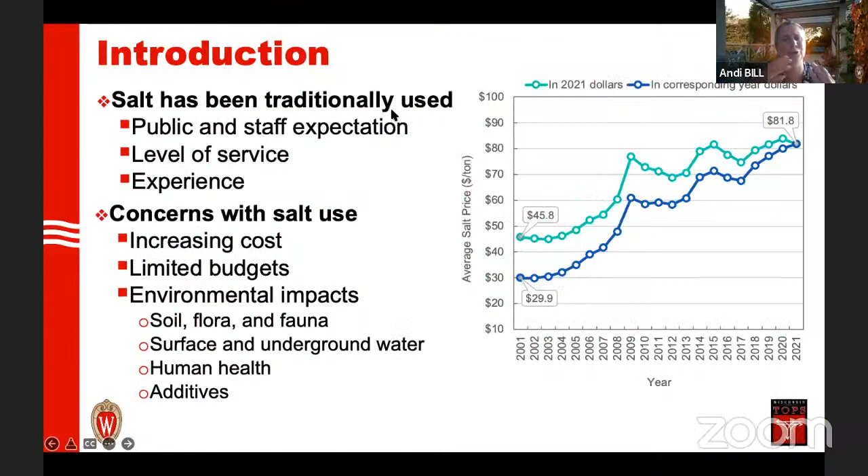Salt has been traditionally used. It is a public and staff expectation about how we clear our roads. It's salt, right? There's a level of service and an experience level with it. But as we know, there are concerns with salt usage.

I was just learning more about what Allison does and this training that goes along with it. Not only is there an increasing cost, which you can see in the graphic on the right-hand side of the screen, but while the cost is increasing, our budgets are not. So we have limited budgets. And as important as those are, we want to think about the environmental impacts as well.

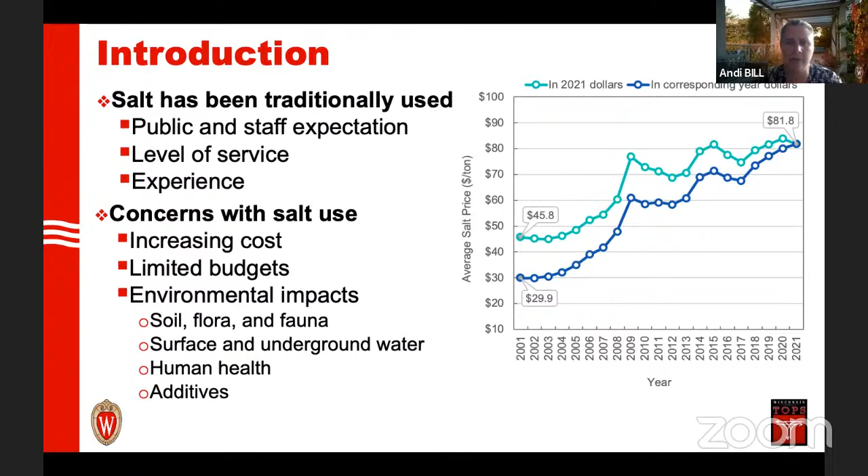Whether it's soil, flora, fauna, or what you guys are working on here with surface and underground water, human health, and also the additives, we know those are concerns with it.

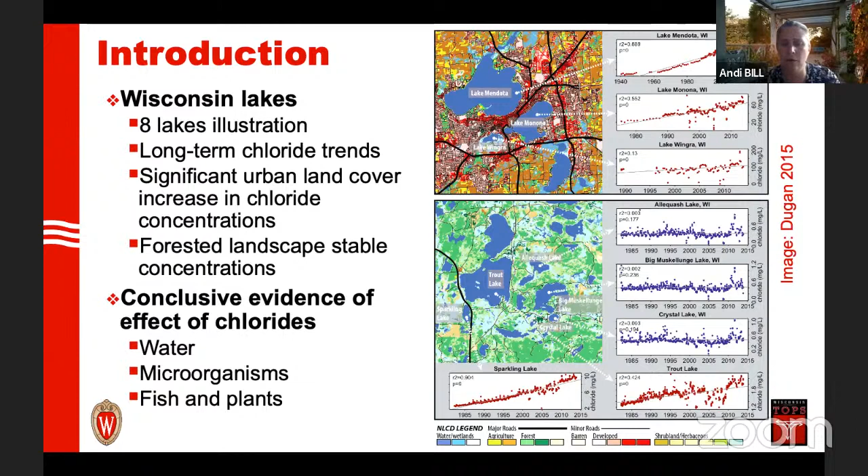So the objectives for the study: we had done a pilot study the winter before, which would have been 2019-2020, right at the end, or right before COVID. Then we wanted to expand the field data collection from the previous research to add more counties and more experience levels.

We wanted to evaluate Wisconsin salt brine applications using four metrics: salt use and salt reduction, the common performance metric of time to bare wet conditions of the pavement, and friction, which I'll put in quotations - we'll talk more about what that is - and the benefit costs of it.

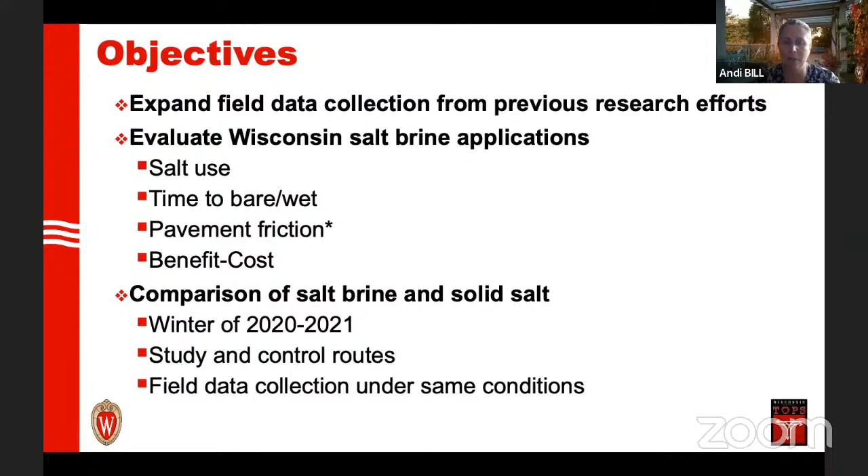We wanted to look at the comparison of salt brine to solid salt use over the winter of 2020 to 2021. We had study and control routes, which I'll talk a lot more about, and we wanted to make sure our field data collection was under the same conditions in both areas.

I won't get too researchy here, but we wanted to make sure our studies were done as accurately as possible so there couldn't be any question about whether your treatment route was completely different than your control route. So we wanted to make sure we looked at that.

We either did a study in parallel, where we had a divided roadway and they salted in one direction and used salt brine in the opposite direction, or we had a county that did a split study, actually over the county line a bit - they divided the route into two sections, one salt and the other brine, so we could compare the metrics.

We also had some areas where neither of the other two were possible, so we did an independent study where the study and control routes were not necessarily directly geographically located, but were in a similar area. We tried to make sure the routes had as similar conditions as possible.

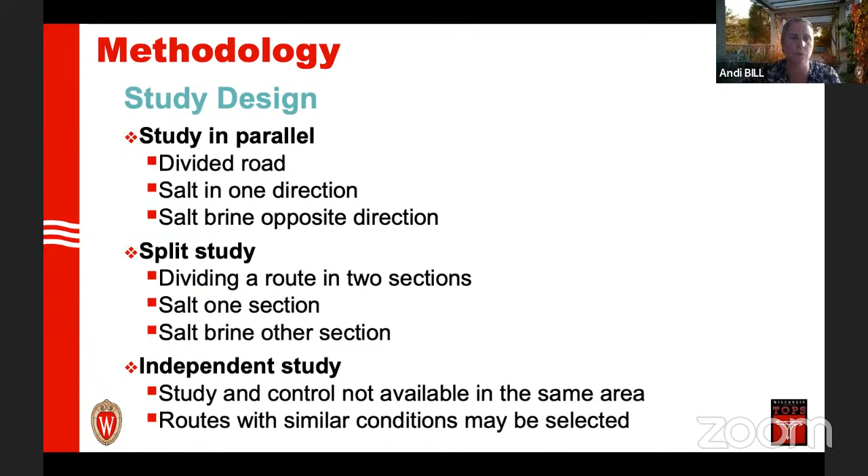So similar traffic volume, similar speeds, similar distance away from the sheds and things of that sort - those were our methodologies in picking the routes. As always, the data collection is so important, and none of this work can be done without our county partners.

We can't do any of this work without having people dedicated to collecting this data and getting back to us on a regular basis. So we started with just the basic route information: what was the location, what is the length of it, what are the number of lanes, and the start and end points of them both.

From the equipment information, we wanted to know what the brine makers were, storage, trucks, spraying systems, and the pumps. Those were collected at the beginning of the study.

And then for each storm event, we had an online report form that got information from both the study and the control routes—the study, I might say treatment routes as well. So the treatment was the salt brine, and the control route is our salt usage.

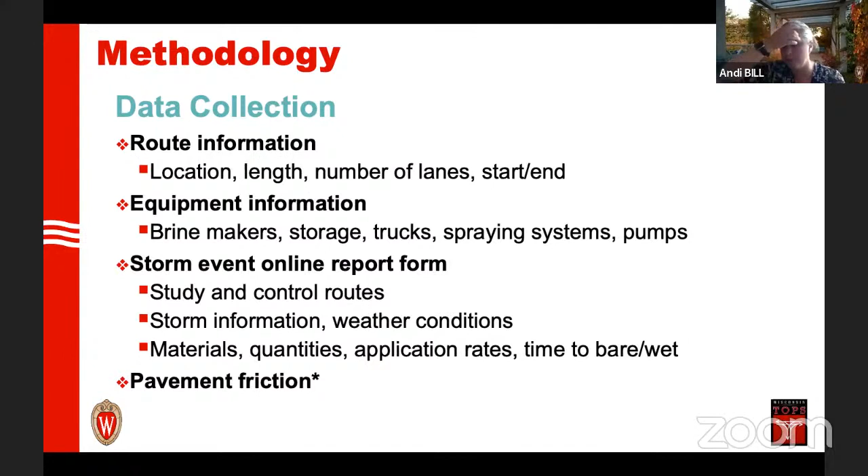We collected storm information, weather conditions, and then we wanted to know materials, quantities, application rates, and time to bare wet. So we want to be able to capture all that information, and then the pavement friction. I know there's an asterisk next to that, and we'll talk a little bit about that.

The asterisk next to pavement friction is there because when we think about traditional ways of collecting friction data, it is by a skid test—you have a wheel that gets put on the roadway, and you're pulling it to see what that force is to pull that stationary wheel through. Obviously, we can't do that at highway speeds, and there are other issues with it.

So we use this advanced road weather information sensor called MARWIS to be able to collect this data. Again, the friction is in asterisk form because it is getting a value of friction with it.

What we really want to do is compare the study and control routes together to see about that. The reason why is that we heard from both law enforcement and the public: 'I can't believe you're putting brine down on the roadway. You're putting water down in freezing conditions, and it's just going to make the road icier and more dangerous. So what you're doing is not improving safety—it's actually hurting safety.' That's what we were hearing qualitatively.

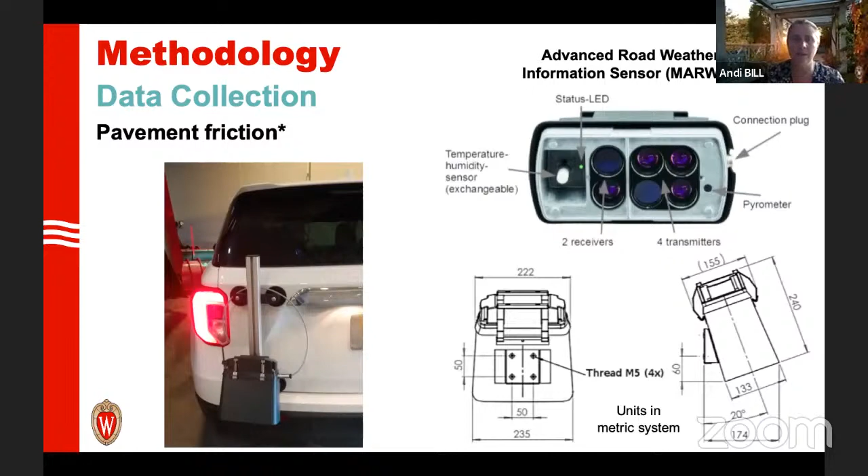And so those of you who might know me say, okay, let's get to the data—let's actually see what's going on out there so we can have hard numbers to compare. There's also information with regards to temperature and humidity sensors, which we'll go into.

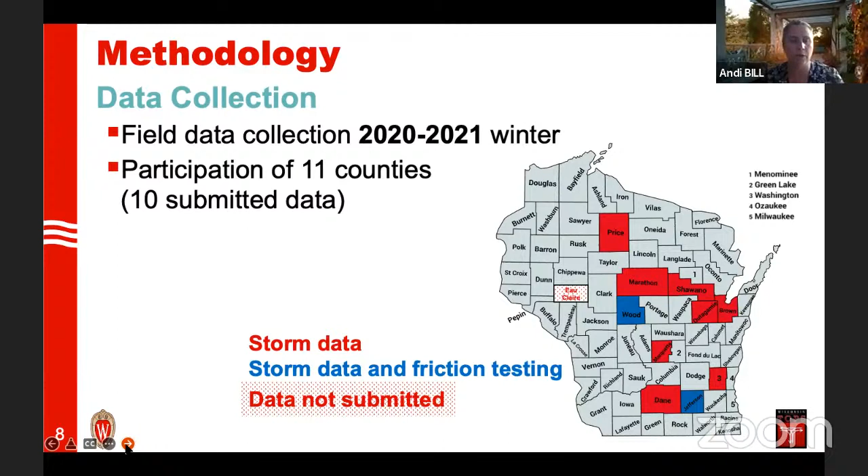You can see for the most part it's pretty spread out across the state. We don't have a lot in the northwest component of Wisconsin, but a fair amount across the state, both north and south, in that central location. So I think it was a fairly good representation of our state.

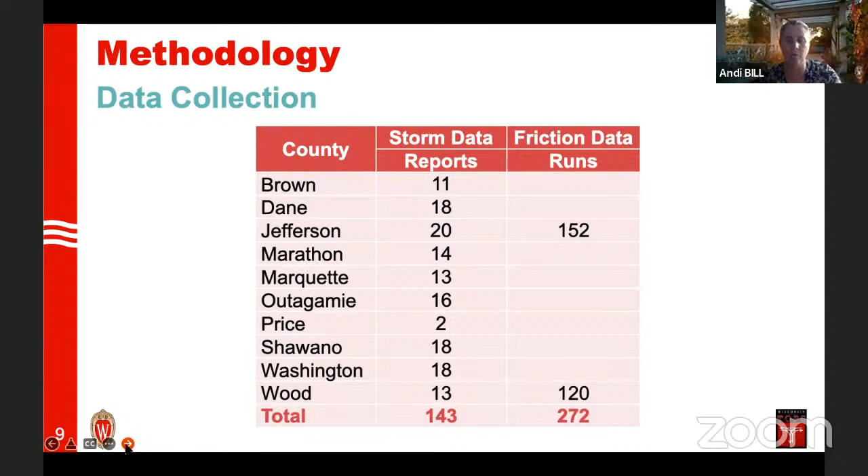So here's the numbers. The first question anybody asks me is usually, well, how accurate is the data? What's the sensitivity of it? You can see here we had storm data reports for 143 storms over those 10 counties, and for our friction data runs, we had 272 data runs. So we have a larger sample size there, which is great to really be able to look at these.

For our data analysis, we did salt use, time to bare wet, and pavement friction. We did a site and group comparison, and we wanted to see if it was statistically significant—so it wasn't just by chance or randomness that these results were different—using a t-test to do that statistical analysis.

We wanted to do a benefit-cost standpoint. Instead of just looking at the cost of salt brine per gallon, we wanted to look at introducing salt brine applications into existing solid salt applications, since most people are already doing solid salt. So what is that benefit cost of introducing salt brine into your actual work? We did a horizon of 10 years to say, okay, what would it take to get to that in 10 years? Do you have a benefit cost that's greater than 1 or not, and how many miles does it look at?

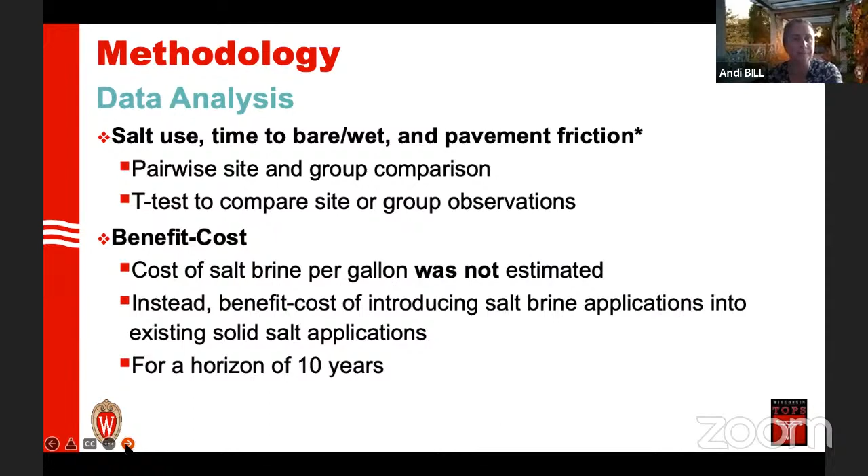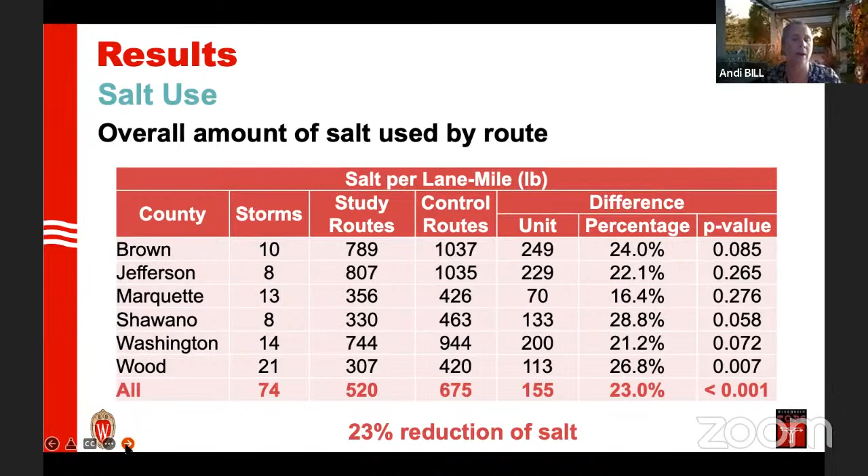So those of you who are familiar with salt brine, this is probably kind of a duh situation a little bit: because it is a solution, we have salt mixed in with the water, the overall amount of salt used by route is less, right? So we can see here that we had a 23% reduction of salt in our study routes compared to our control routes. You can see that p-value there is very, very low. It was statistically significant, which was great to show that, yes, we did have a reduction in salt when we used the brine on the routes compared to the solid salt that we were using before.

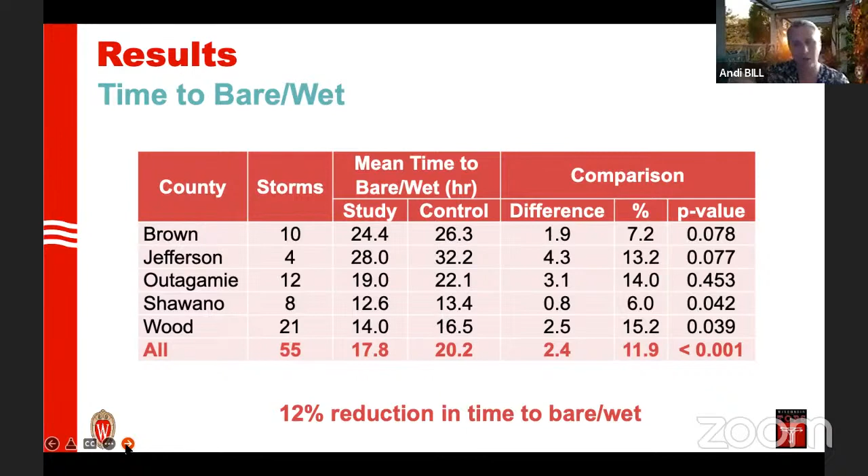The next thing is something that we use to say, okay, well, how quickly are our roads getting back to normal? So we talked about that as our time to bare wet. So what is the amount of time that it takes our roadways to get back to bare wet conditions? And so here we can see by our data that we had a 12% reduction in time to bare wet. So not only are we using a lesser amount of salt when we use our brine on our study routes, but we're also seeing a reduction in time to get back down to bare wet conditions. So far so good. You can also see that p-value there is below 0.001, so statistically significant as well.

Okay. So pavement friction, right? This was, again, the question that I kept getting, whether it was from the public or on social media or by law enforcement, to say, seriously, Andi, why are you putting water out on these roadways? And so looking at our pavement friction, this is a lot of data here, but what you can see is the control route is in the blue, and the pink or red route, depending on how you're looking at your screen, is the brine route, the study route.

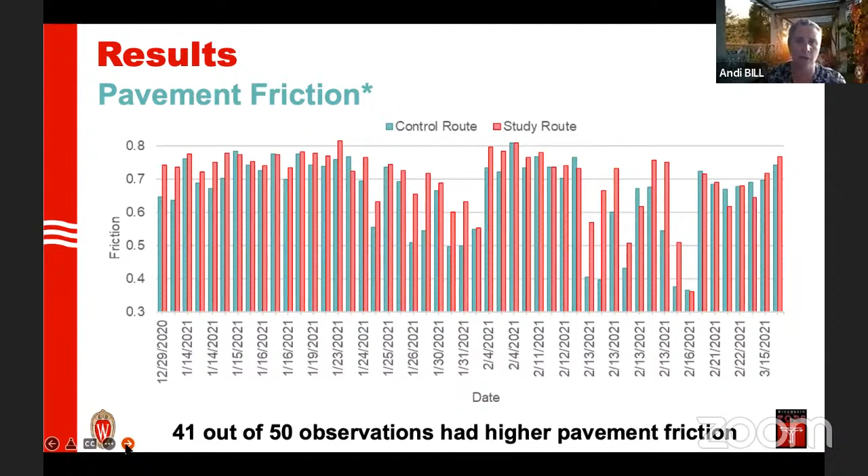And what you can see, if you look just generally over it, 41 out of the 50 observations had a higher pavement friction value than the regular salt. So it's not 50% of the time, it's a majority of the time we were seeing higher pavement friction values with the brine compared to the solid salt. So great there. Another way of looking at this is called roadway condition. It takes into consideration some of the ice on the roadway and things of that sort. 39 out of 46 observations had a higher roadway condition rating as well. So really good information there.

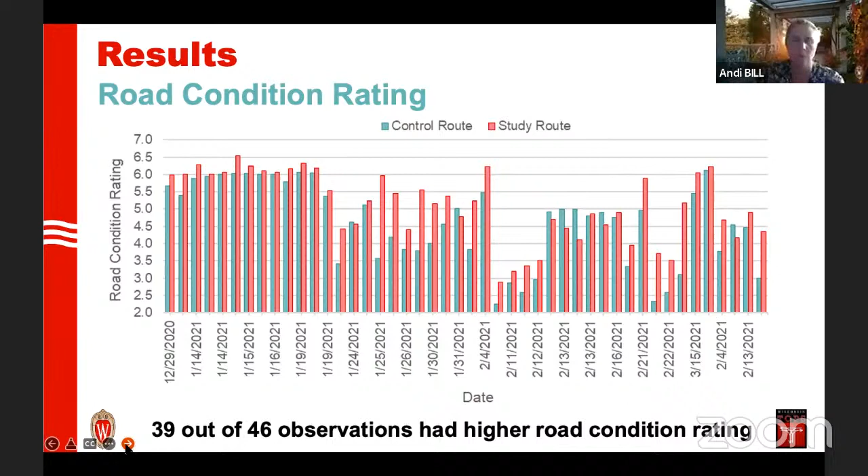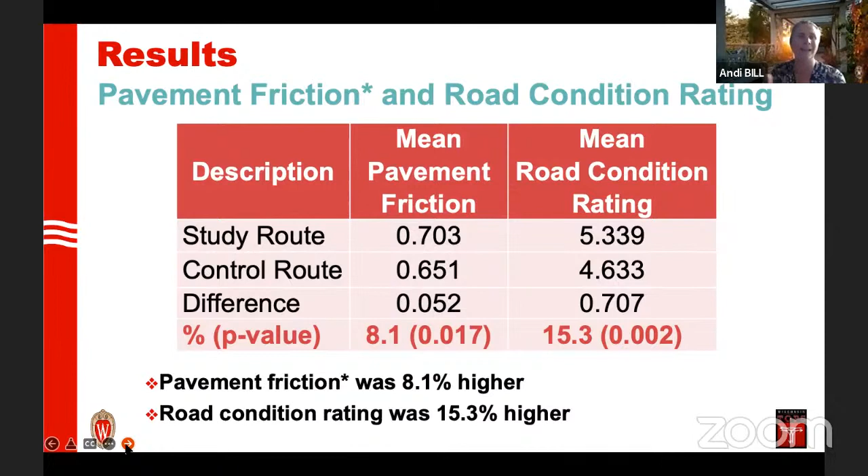So what we saw was pavement friction was 8.1% higher with the study route compared to the control route. And when we look at the road condition rating, it was 15% higher, again with brine compared to our solid salt usage. So good information there to be able to say, okay, it's not just a reduction in the time to bare wet and the salt usage, but it is also an increase in our roadway condition, right? So this is getting back to the safety of our roadways.

What's nice is that we can take a look at the time series component of this as well, to be able to see, okay, how is this working over time? So as Allison was mentioning, they do a lot of outreach. Salt brine is one tool in a toolbox for how we can reduce the salt on our roadway. A lot of it's just about education and outreach, and we're still learning more about this, right?

So storm fighting, unfortunately, isn't just a science, it's also an art, based on what type of storm is happening, what the temperature is, is it increasing, decreasing? Is that snow sticky and heavy, or is it light and fluffy? All of that goes along with it. And using these devices, we were able to track that pavement friction over time.

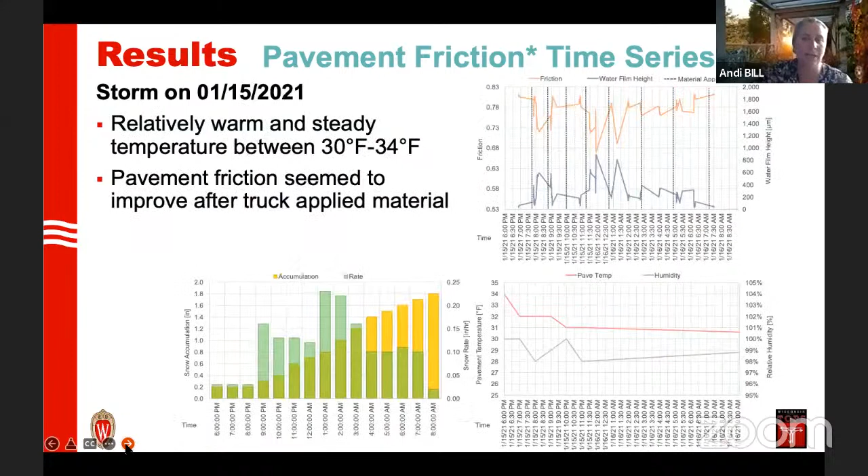So that was on January 15th. This is on January 19th. We had variable humidity and the temperature dropping from 29 to 15 degrees. So again, you can see that in the bottom right-hand side that goes along with it.

Here, what we're seeing is because of that dropping, friction is highly correlated to how much water film height is on there. That deepness of the water film, that height that we talk about, is really correlated to that. If we had a lot, then it's going to be a lower friction value. And if that's lower, then we see a higher friction value.

So again, being able to really examine that to say, okay, as we're getting this salt brine down and these dropping temperatures, we're seeing that as it's melting, it's creating some water on there. How do we get that water off? How do we make sure that water film isn't getting greater, and really getting it across and out of our roadways, which then we have to be careful of where it's going after that, but we can look into that as well.

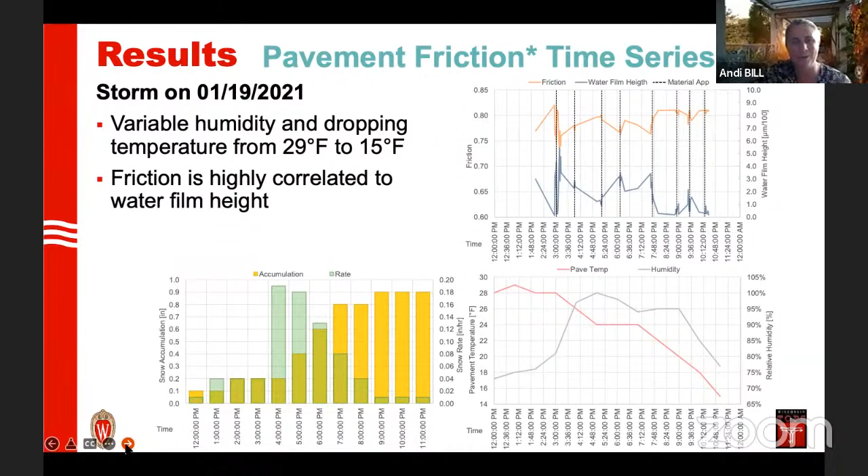And then this was a storm on February 13th, very low temperatures, less than 3 degrees Fahrenheit. It had a formation of ice between 1 to 3 p.m. We did calcium chloride and solid salt here. And the frequent application improved the friction and reduced the ice percentage there.

So you can see in the top right-hand side those vertical lines of where the material is applied, and that ice percentage. And then you can see as we get to that 1 to 3 p.m. there, the vertical lines happen a lot closer together. So again, the more frequent application improved the friction and reduced the ice percentages.

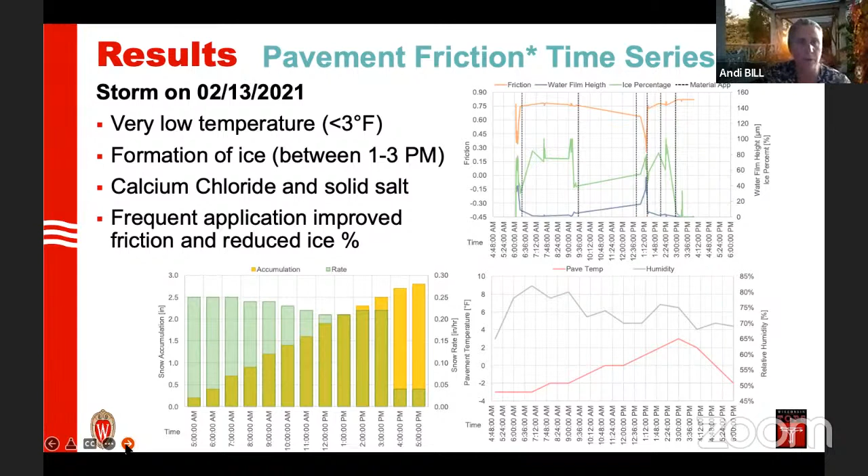So really good ways to start to look at how we use this data to make better decisions about when and where people should be out on our roadways fighting our storms. So that was one piece of the data analysis side of it. And as we talk to our management, it's always about, well, what's the benefit cost, right? So as we change things, there's going to be an increased cost while we change it. How do we look at that?

And so the benefit cost is the benefit times the amount of lane miles that would be salt brine routes times the number of storms over a 10-year period, divided by the cost over 10 years. So the benefit is that reduction in salt by using brine, how many would be salt brine routes, and then how many approximate storms this would be good for, right? Because as we think about salt brine, it can't always be used equally across all temperatures, right?

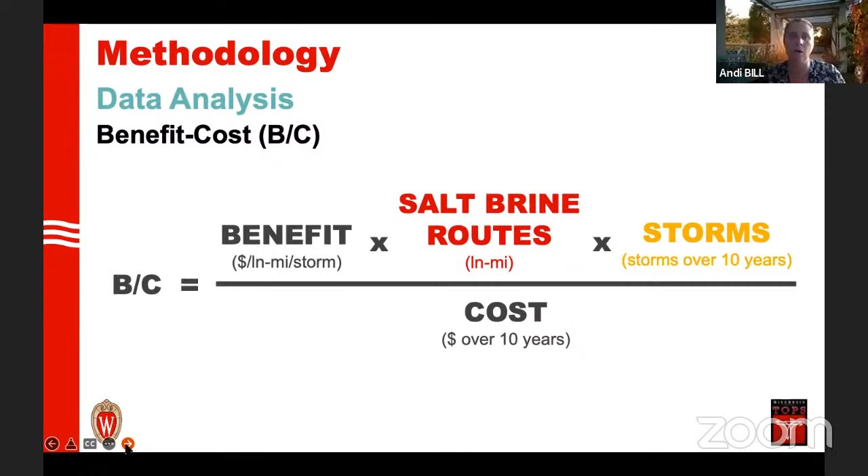There are certain temperatures that it works better at than others, and that's what we really want to be thinking about. So this is what we're looking at. The benefit is our control route, which is our solid salt and our trucking over the lane miles for those storms. The minus is that study route that we want to talk about there, that salt brine, solid salt, looking at the cost of salt, water, electricity, because it takes brine makers, it takes extra work to be able to make this brine up.

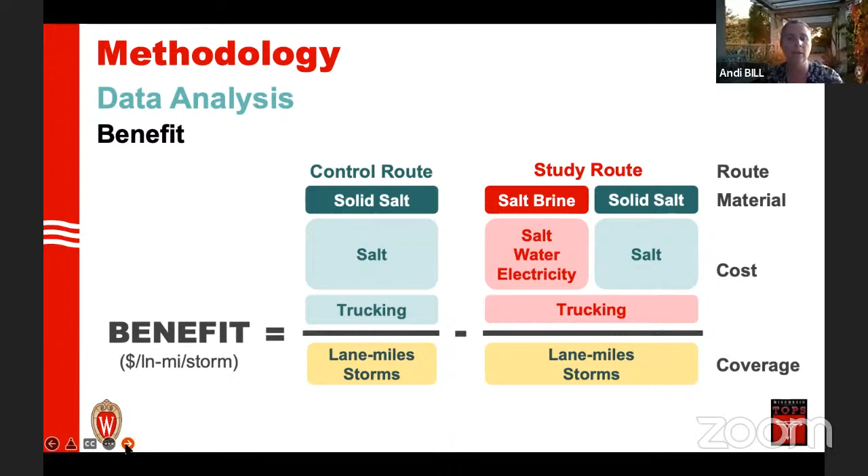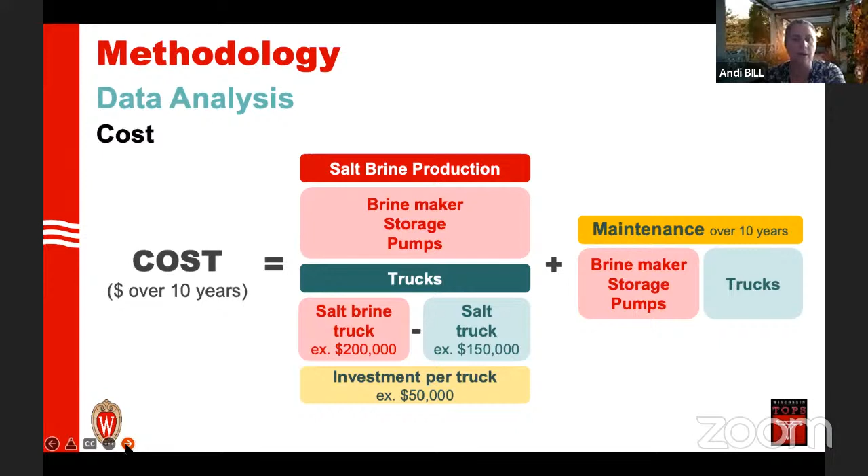And looking at that, the trucking costs over those lane miles, that's the benefits of having these. The cost is the salt brine production, those brine makers, the storage and pumps, and the trucks, the salt truck. So we do understand that some salt trucks can be outfitted with brine as well, but being able to look at that difference in costs. And then plus the maintenance, right? So the maintenance over 10 years, the brine maker and storage pumps, as well as the trucks that go along with it.

We then needed to think about this benefit by storms, right? So as I talked about, brine works better in some conditions than in others, and we really wanted to be able to look at those. And as you can see here, this was the information that we have over a variety of different storm types by temperature. On the left-hand side there, we can see that there's a lower benefit in the lower temperatures, but as we get up into the higher temperatures, there's a lot greater benefit. And so we needed to be able to compare those, because not all storms are created equal, and we have a variety of different storms in our area.

And so again, depending on where you live, you could think about this a little bit differently. If you're in the southern part of the state, you may be more in this region more often, and maybe if you're in the northern part of the state, maybe you're over in this region. And those are still things we need to look at and examine more closely. And I'll talk about another project here at the end that we did that on.

Just gonna check my time here.

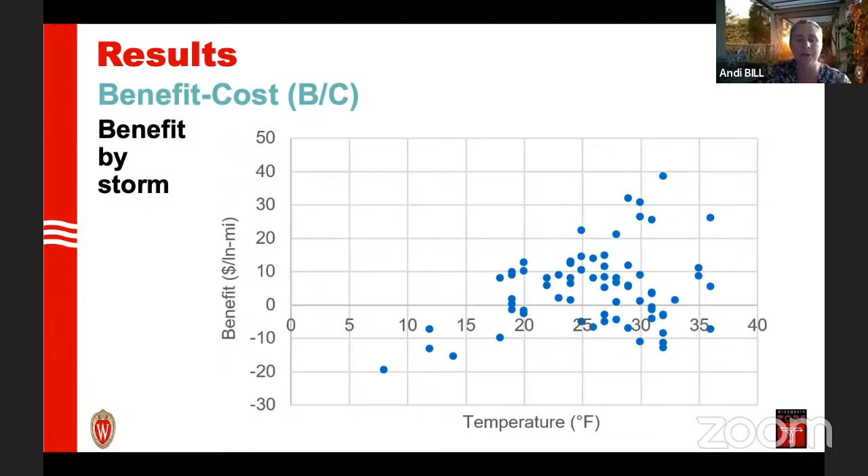Okay. So we looked at the number of storms by temperature and snow intensity. We binned those up into these different characteristics. So temperature is less than 15 degrees, and we had a bin of A, which is 15 to 19 degrees, a bin of B, which is 20 to 24 degrees, and then C, which was greater than 24 degrees. We then looked at snow intensity, light versus moderate to heavy. Light is less than 5 inches in a 24-hour period. Moderate to heavy is greater than 5 inches in a 24-hour period. Those were 1 and 2. So you'll see in the next slide, we might have A1, which is a temperature of 15 to 19 degrees with light snow intensity.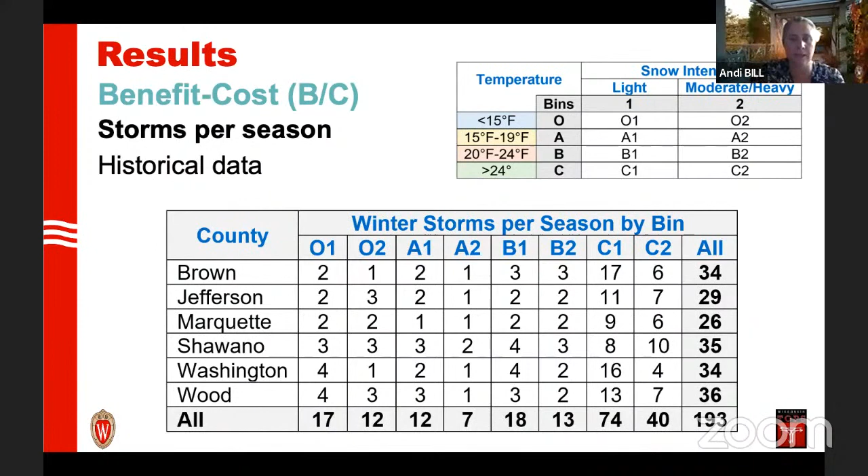So we're able to see that through the process. And then we wanted to look at the cost of investment in the lane miles treated by each county.

This is definitely different by county and what they're looking at. Are they looking at interstate, or are they just treating interstate and state highways? Some folks are also treating their county highways as well. This isn't taking into consideration any municipality work. This data was all collected by counties, but you can definitely use something similar.

If you have questions about how to make this case to your management, please reach out to me afterwards. We'll be more than willing to help you look at this. So depending on where you're from, you might be thinking about your municipality or village mileage as well.

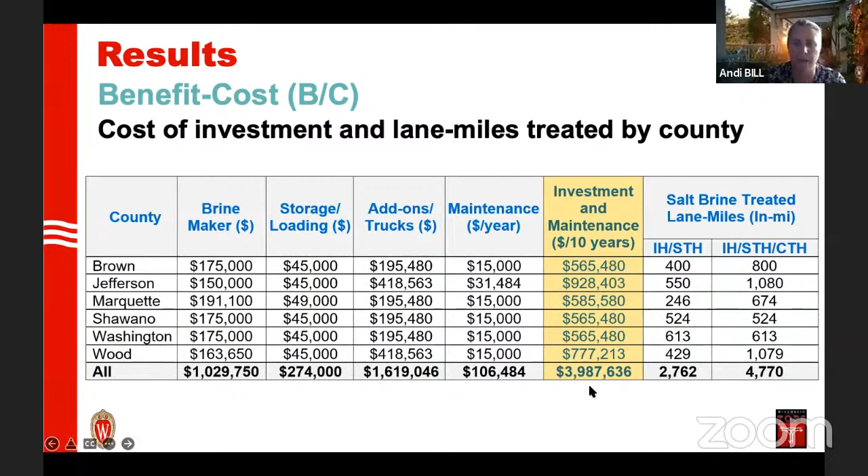So you can see the brine maker cost, the storage and loading cost, add-ons to the trucks that happen with it, and then the maintenance that goes along with it for each component. You can see the investment and maintenance dollars over a 10-year period that goes along with it.

So we looked at it from each county, the benefit by those bins that we talked about, and then the cost. You can see there for each county kind of what we're at there. So, greater than one, a benefit cost of greater than one overall, and then different levels. This is more just by how many mileages are being treated and looked at a little bit more carefully. So that was just looking at interstate and state highways.

As you can see, as we start fighting more of this on our county roadways and including more mileage, the benefit cost goes up, right? And so we see a benefit of trying to do more work with brine than solid salt in some of these characteristics, and you can see that on this one. So the difference between these two slides is just we're adding those county trunk highways into it as well.

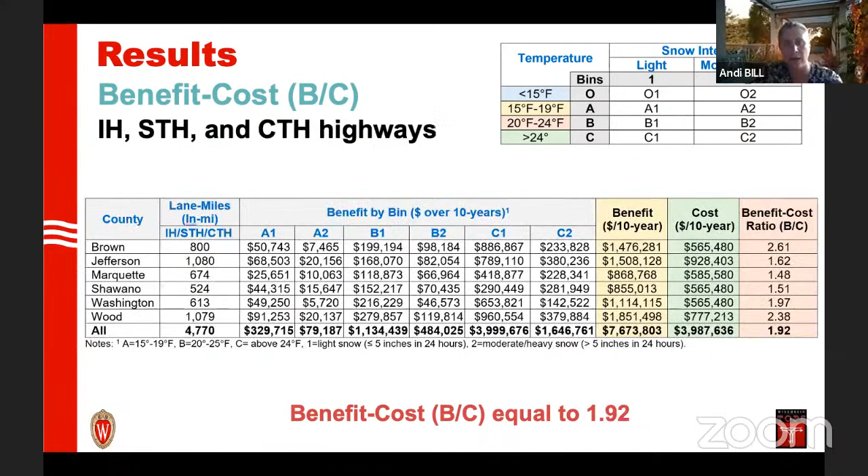As we think about the results here, just to summarize: we saw a significant reduction in salt use of 23%. Time to bare wet was reduced by 11.9%. We saw higher friction values and road condition ratings with it. And overall, our benefit costs are greater than one, especially the more routes, the more lane miles that we use, the greater that benefit cost is associated with it.

So we saw a really good summary here that brine is working well. We're seeing it do what we think it's going to do, and learning from it each and every time that we continue to do work with brine.

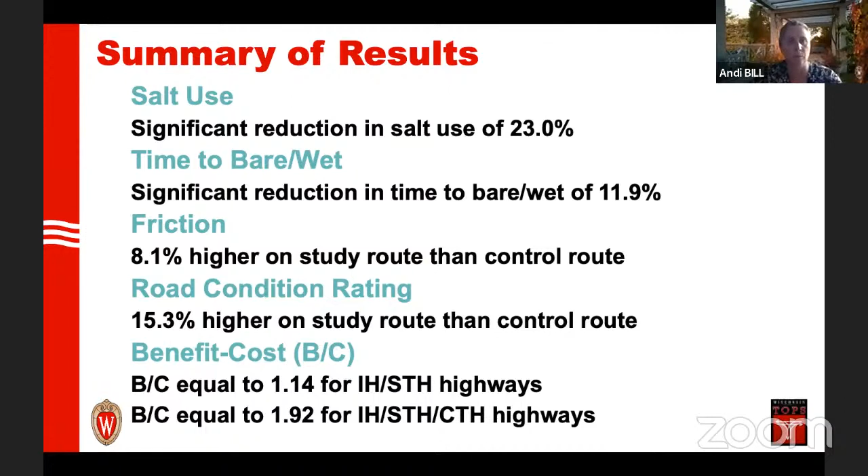Yeah, I think that's kind of self-explanatory of what we've talked about before. So I'm going to go on to a clear roads project that we did.

This was similar in concept. This was expanding application rate guidance for salt brine blends for direct liquid applications and anti-icing, again just looking to see when brine should be used and what's going on. What we saw here: the research needs were that there was limited guidance on the actual application rates, especially for liquid de-icers at low to moderate temperatures over diverse roadway surface conditions.

Materials in liquid form can be many different things. So salt brine, which is what the WisDOT project kind of focused on, but there's also calcium chloride, magnesium chloride, and any agro-based byproducts as well.

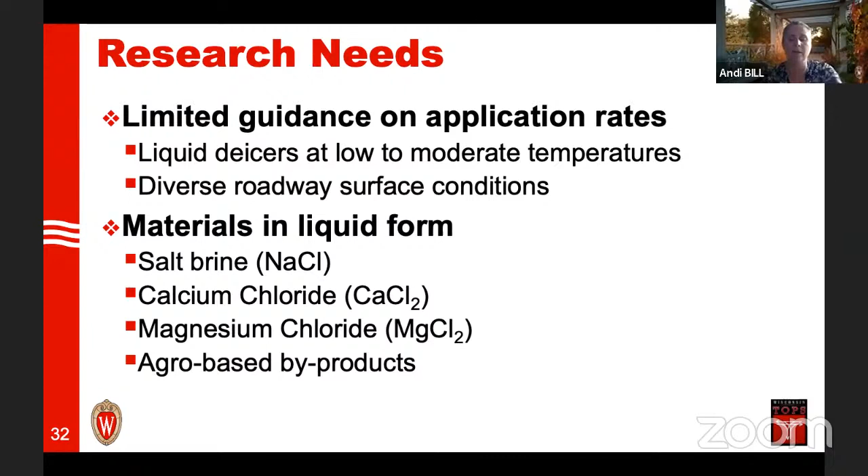So we sent out a survey of practice, and you can see here we had 31 responses over a variety of different areas. We did have 6 folks responding from Idaho, but everybody else, we got about 1 response from, for the most part, throughout the country.

This was just kind of understanding what the experience level is, right? So 94% of the agencies use liquid applications. 70% indicated that their agencies use liquid applications at pavement temperatures below 20 degrees, which is what we wanted to cover.

We asked if they had guidance available. 67% said they do have guidance for when to use liquids. We did get 11 respondents that submitted their guidance documents to us.

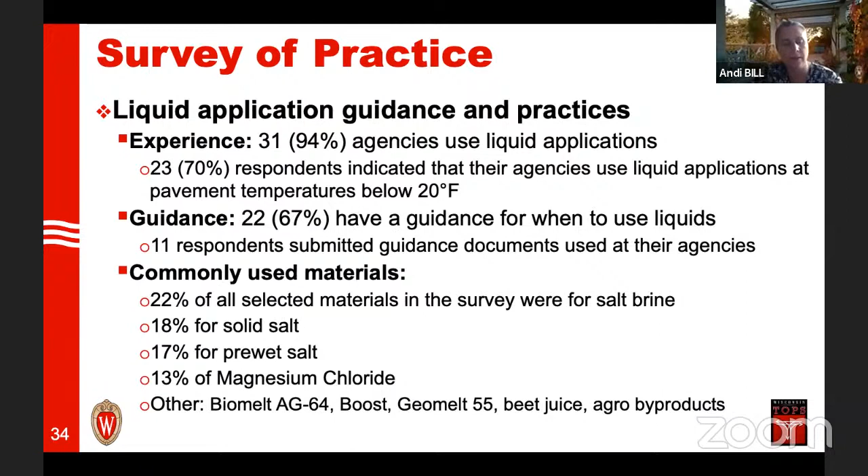And then we asked what their commonly used materials were. You can see here that 22% of selected materials in the survey were for salt brine. We had 18% for solid salt, 17% for pre-wet, 13% for magnesium chloride, and then another category that included a whole bunch of different products listed on that last bullet.

We think about the liquid application guidance and practices relative to pavement temperatures. Most agencies said they use it between 20 to 32 degrees, and most avoid using liquids at pavement temperatures below 20, but we did see 4 agencies use liquids at pavement temperatures below 15.

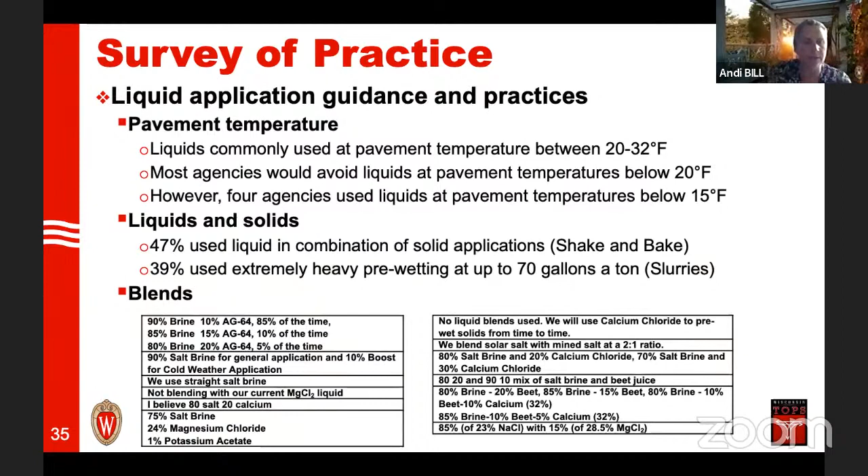There was 47% that used liquid in combination with solid applications. A new term I got to know as we went through this is what people in the agency or industry call shake and bake — that's a combination of liquid with solid applications. They also had 39% using extremely heavy pre-wetting, up to 70 gallons a ton, more like a slurry. You can see the different types of blends we got back in the survey results — some good information there.

We always ask how agencies are measuring this — what are your performance measures and how do you look at that? Similar to what we saw in the other project: amount of salt used, time of bare wet pavement, cost of materials, friction testing, cycle times, level of service, traffic volumes. They might also use automatic vehicle locations, video feed, or road weather information systems.

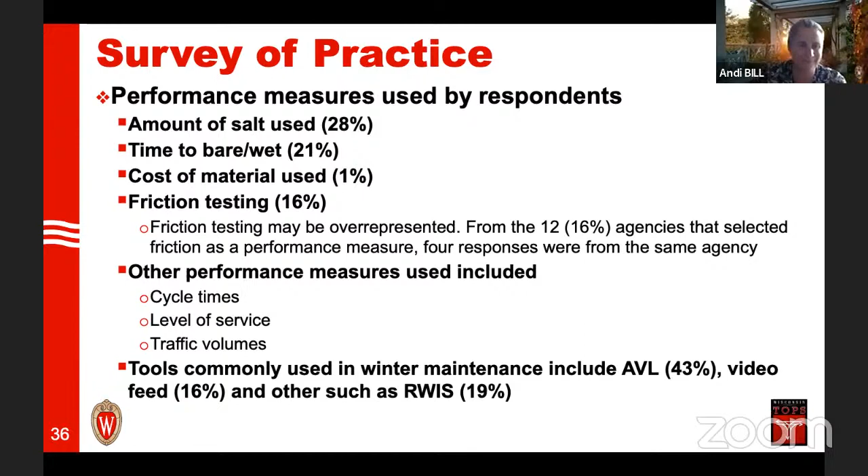For this one, we looked at 10 agencies that already had experience with liquid applications and indicated their willingness to participate in the study. They collected and provided data for us — we didn't have any agencies that were just planning to do it and wanted to get started in our project, so we already had existing agencies involved. We did follow-up calls asking about their internal information on commonly used application rates, making sure they were willing to participate and gathering more information through the process.

Similar to what we did in Wisconsin, we have the state, the agency, the routes, and the number of storms we got data from. We had 9 states, 17 agencies, 31 study routes, and 167 storms. It was very similar — the Wisconsin data is the same as what we used for the Brine project for WisDOT, but now we're including other states to get a more comprehensive look across the US for this project.

There was a research project, 15-01, that was a material application methodologies guidebook. The table below is something from that guidebook — looking at light snow, different pavement temperatures, what the trend is, and the road surface condition. You can see those application rates listed there. All those numbers were great, but what you see in yellow was not available in the previous project.

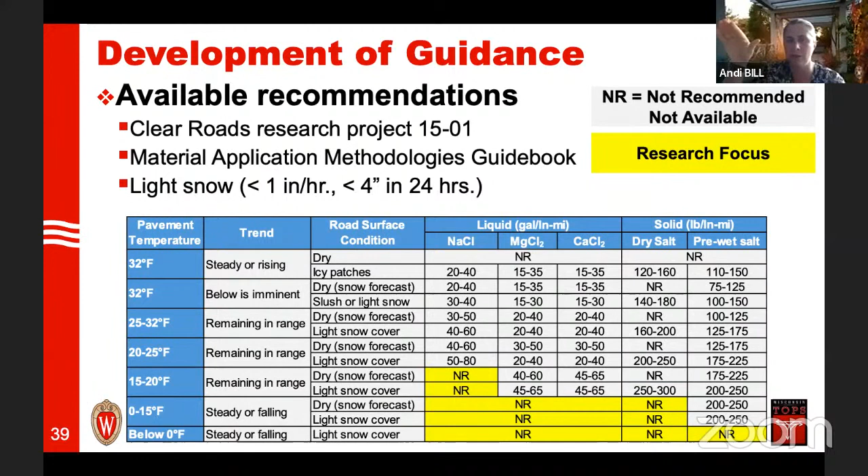That was our focus for this research: how do we get to those lower temperatures? Are there application rates we can suggest for folks to look at? Having this information means that as you're coming up with a plan and doing training with your agency, you can say here's what we expect to see under different pavement temperatures — what is that trend, is it going up, staying the same, or going down, and what is the roadway surface condition as well.

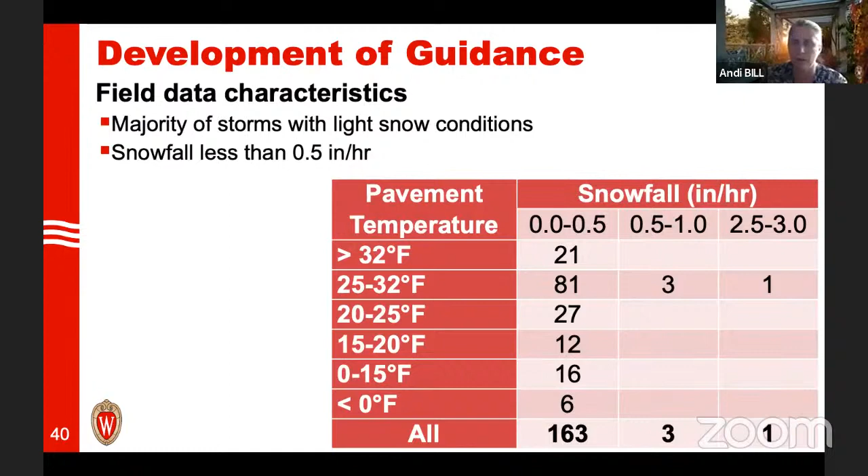We saw a majority of our storms with light snow conditions — snowfall less than 0.5 inches per hour. You can see how that broke down in this table.

We wanted to get field-based application rates, knowing what people are actually doing in the field, but also wanted to make sure we vetted that information. So we had a lot of practitioner involvement — practitioners with extensive experience with liquid application. We wanted to share our observed field-based application rates, get their feedback, validate our application rates, and raise awareness about specific conditions. The guidance we talked about for shake and bake was adjusted based on that feedback, partly because we had low sample numbers.

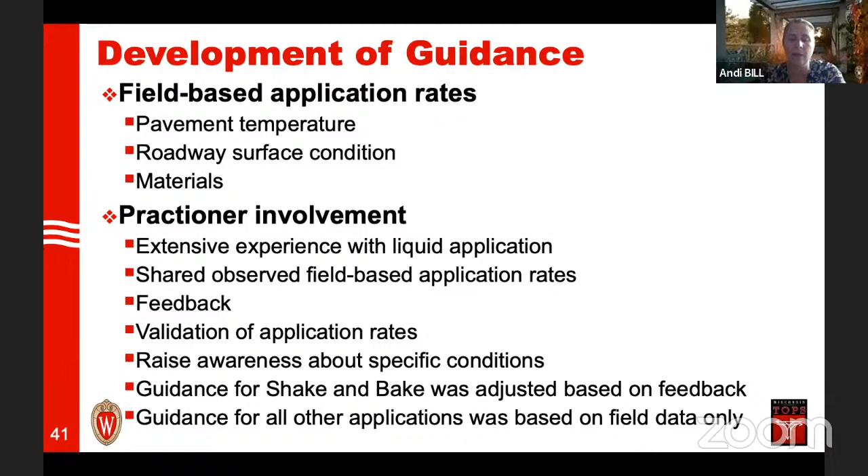And so we wanted to make sure we clarified that. The guidance for all other applications, which I'll show you, was based on field data only. We got comments back from our practitioners that said, yes, that's correct, go ahead and print those.

So here's what the guidance looks like. This is actually available on the Clear Roads website now, and I'm more than happy to share this slide deck with Allison so she can PDF it and put it up if it's helpful for folks as well.

So these were liquid applications without blending. What you can see here is the pavement temperature, what that trend is, the road surface conditions, and what the gallons per lane mile are. And then I think it's always helpful to know how many storms and what the locations are, so depending on where you are, out west, in Wisconsin, or out east, you can start to say, okay, does this look like our area as well?

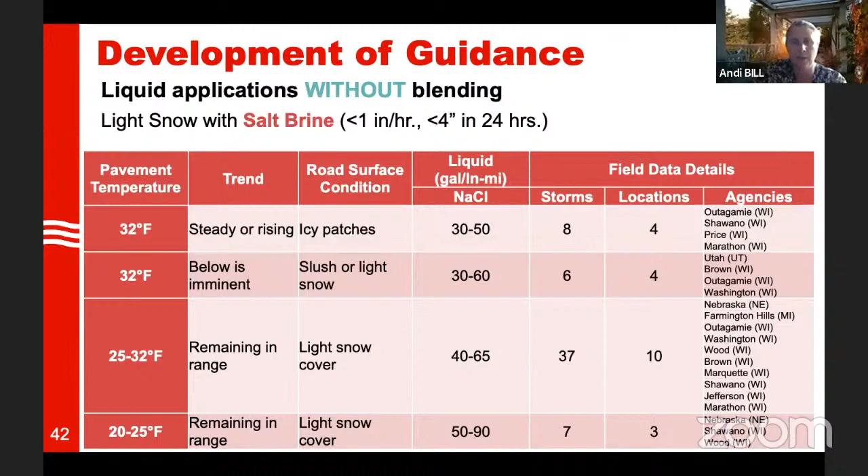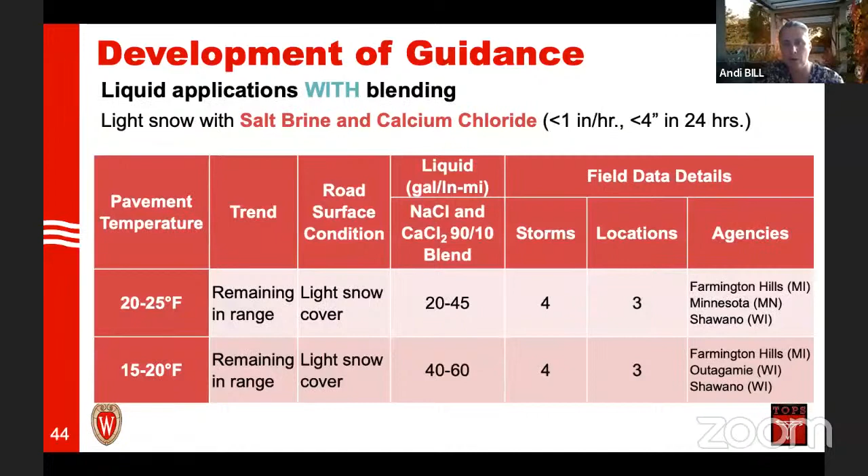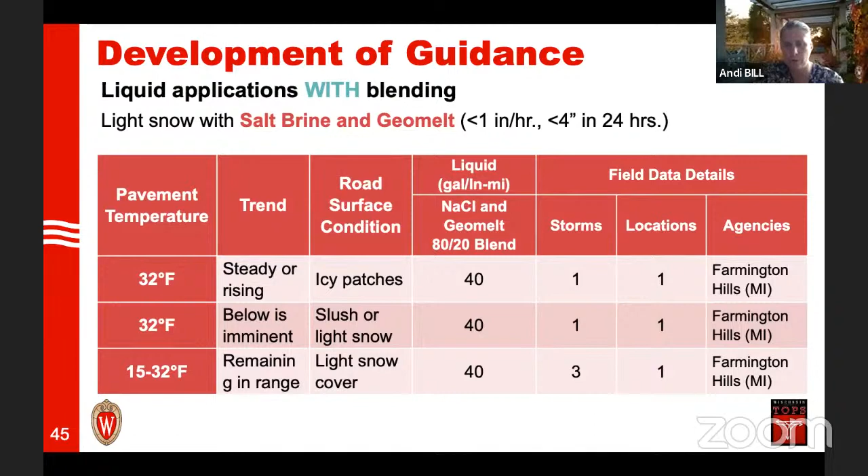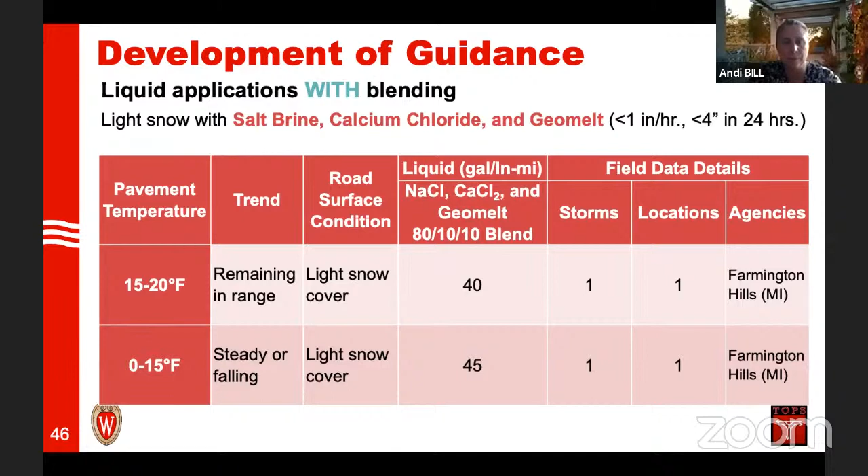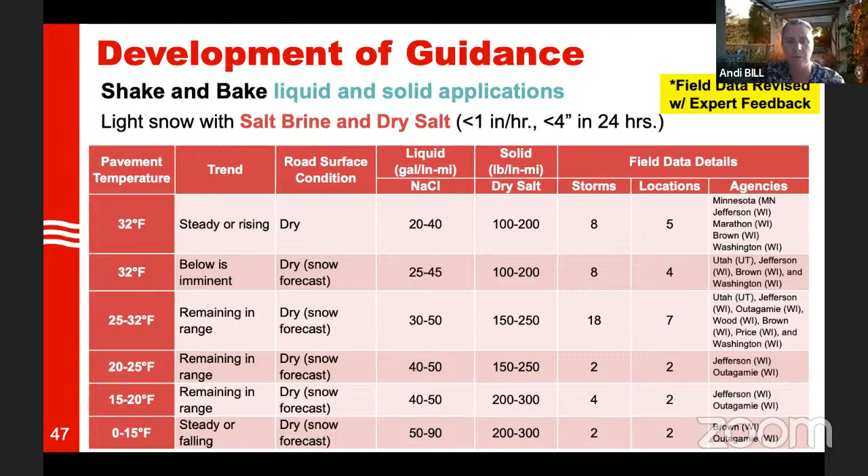So our final report included all of the information that we talked about: literature review, survey of practice, field data, application rates, the practitioner feedback that we got, and then the appendices, which I think are the most important, the available application rate guidance, the survey questions, and the field data collection forms as well, to be able to look at it.

I obviously cannot do this without our team. So I'm just on there as the associate director, but we have two great scientists, Dr. Madhav Chitturi and Dr. Boris Claros, who are helping with the data collection and analysis component. And then our director, Dr. David Noyce, who's on there as well.

So with that, Allison, I'll see if there's any questions available, and I'm more than happy to share any of this information with folks if they would like it.